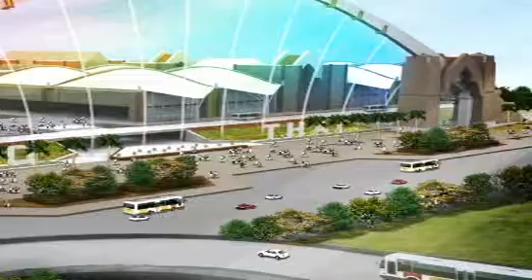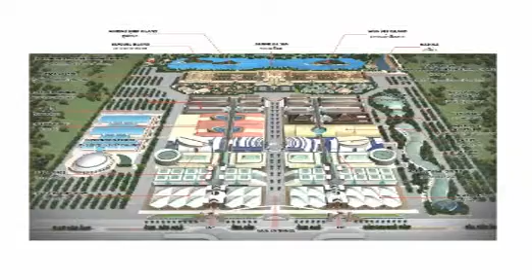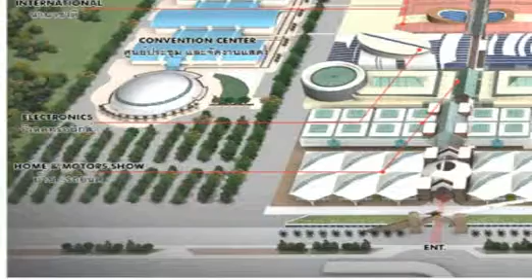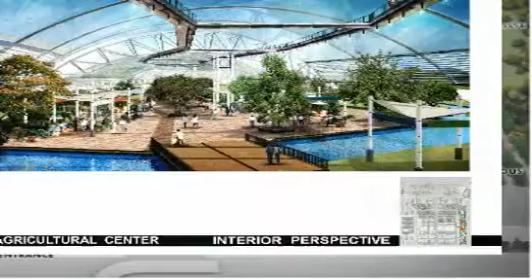Background: at the initiative of Mr. Torsak Bamrungtakul, Managing Director, and Kun Grisada Limamapa of Patumwan Light Company Limited, a seafront area of about 1,050 rai or 420 acres. His concept was for a large trade exhibition center to be created on the area as the market for all types of merchandise, with emphasis on opening up outlets for mass retailers so as to create jobs and opportunities for small producers, affording them direct access to the market without passing through middlemen. Costs can thus be reduced, while the potentials of the seaside town of Mahachai or Samut Sakhon province, the major seaport on the Gulf of Thailand, are enhanced and highlighted.

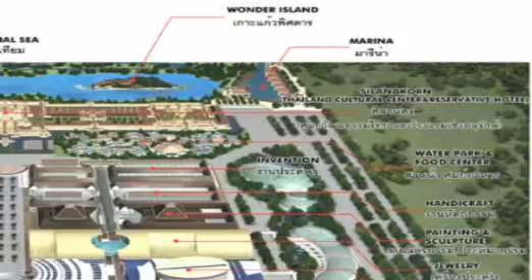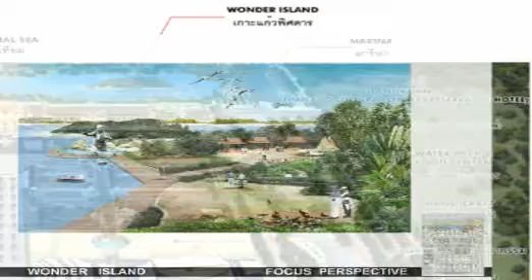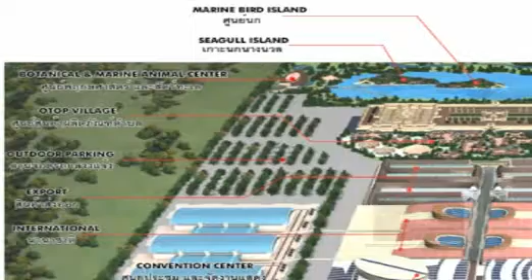For such a major market for mass retailers, the area will be developed as an eco-tourist site with the conservation of marine plants and animals, as well as the mangrove forest. Venues for exhibitions, seminars, and performances will be built to attract visitors to take part in various activities, relax, and shop for food and commodities at local and national levels.

The Expo Thai project is located on the Seaside Road, Phanthai Norasing Sub-District, Mueang District, Samut Sakhon Province. The project has the following accesses:

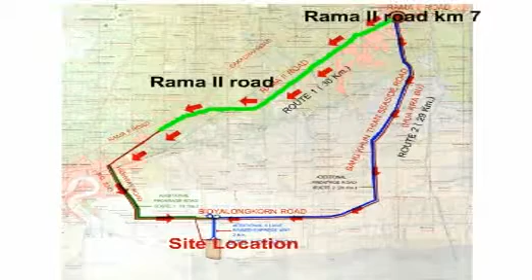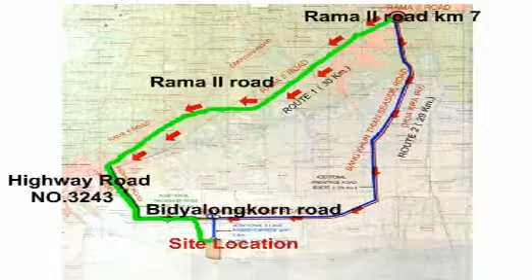Existing transportation routes from Rama II Road at kilometer 7. One travels along Rama II Road and turns into highway number 3243, Mueang District, Samut Sakhon Province, to Bidyalongkorn Road and the project site, a distance of about 30 kilometers.

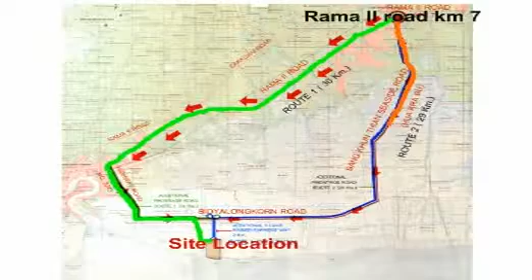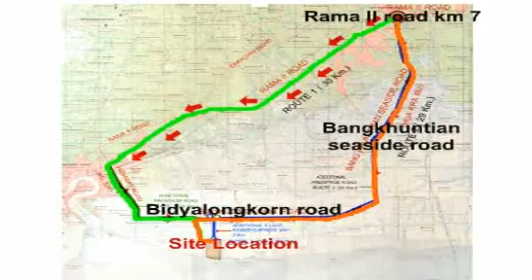From Rama II Road at kilometer 7, one takes the Bangkhuntian Seaside Road and turns into Bidyalongkorn Road and the project site, about 29 kilometers in distance. The project site is about 65 kilometers from Suvarnabhumi Airport.

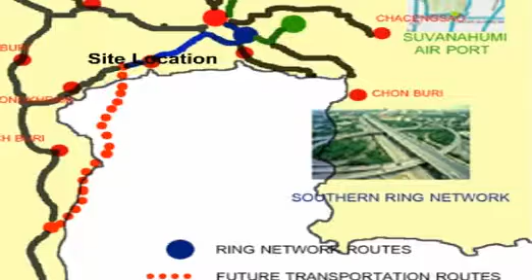Future transportation routes: BMA Southern Ring Road Project, Bang Pli towards Bangkhuntian. The coastal motorway lining the Gulf of Thailand with the southern region. The new southern MRT from Rangsit to Mahachai Station.

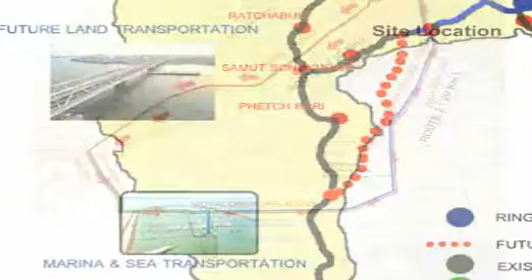Additional transportation routes facilitating access to the project: a parallel road from Rama II Road from Mahachai New Town to Bidyalongkorn Road in front of the project site, about 14 kilometers in distance.

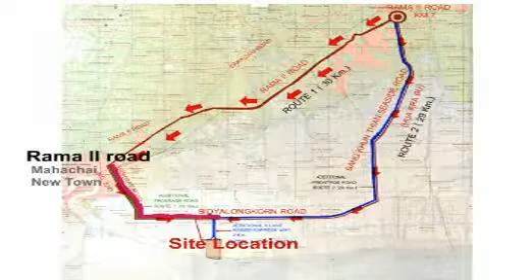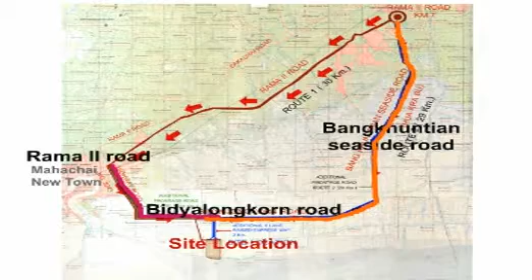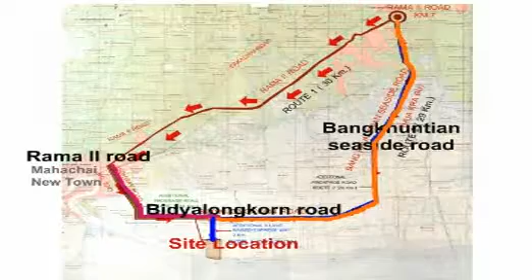A parallel road from Bangkhuntian Seaside Road to Bidyalongkorn Road, about 29 kilometers in distance. A raised expressway from Bidyalongkorn Road to the entrance of the project, about 2 kilometers in distance.

Project components: conceptual idea, land use and building area. Sellable part of the project. First, Exhibition Trade Center. Concept on marketing and finance.

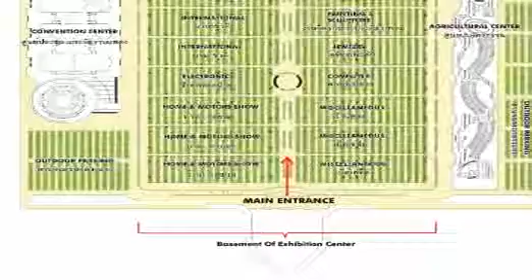The Exhibition and Trade Center is the most important part of the project as main income earner. The construction of the entire project can be funded by space leasing. 20,000 commercial units of 2 by 3 meters can be set for a 40-year lease at 600,000 baht each. This represents a lease of 15,000 baht a year or 1,250 baht a month, which is highly competitive.

Yet the amount raised can fund the entire project or most of it. The project's sale concept is similar to that of major department stores, which mobilize capital fund and minimize bank loans for the construction. This concept therefore opens up opportunities for small retailers with modest funds to start businesses of their own, which can be sustained by the next generations.

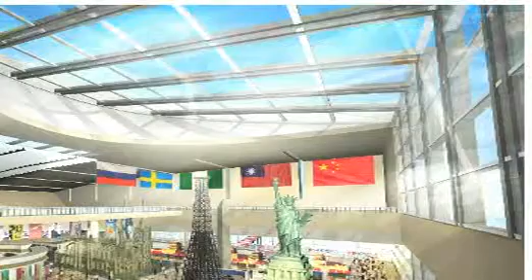Architectural design concept: the Exhibition and Trade Center needs large and open space, divided into various trade zones as designated in the project. The design is therefore an open plan, featuring a superstructure of steel frames with supporting piles sparingly used. The structure is neat, with metal sheets as the main material for walls and roofs.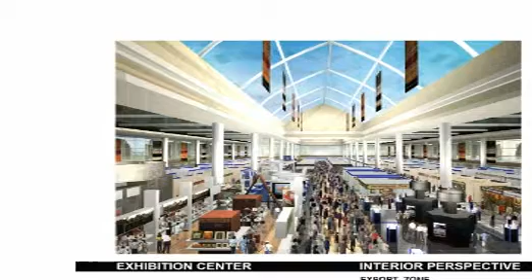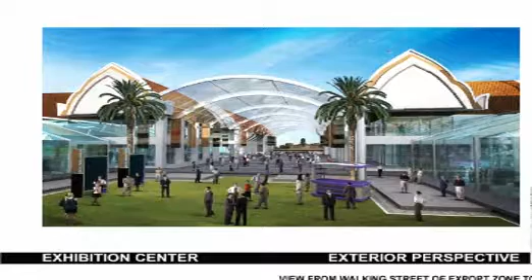The structure takes the appearance of a modern building in the front. The inner part increasingly combines contemporary with traditional styles by means of roof and wall decorations, harmonizing with the next zones.

Convention Center, first auditorium: designed as a circular dome-shaped building for the free flow of space and maximum audience capacity, affording wide-angle views from all seats.

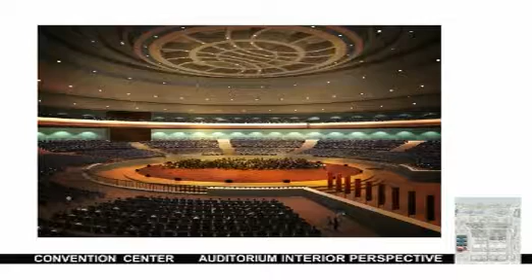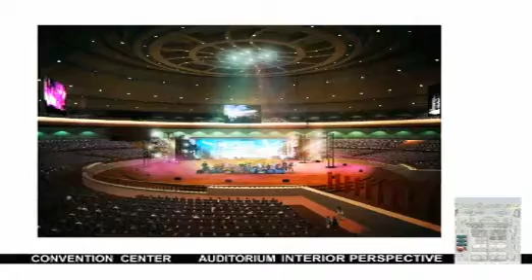Seats are arranged in stadium type, with the arena to put up performances and dressing rooms for performers. The building accommodates about 10,000 people at one time. The outer area can be used for related activities such as open-air performances, bazaars, and fairs.

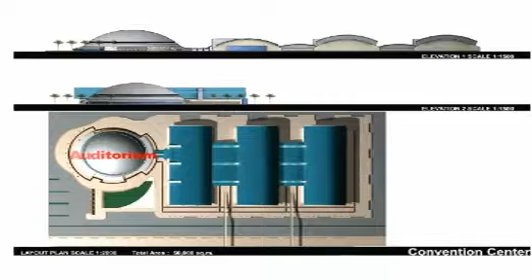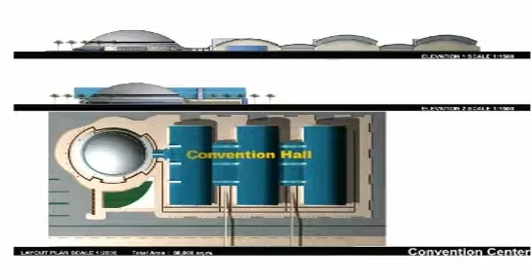Second Convention Hall: a group of 3 buildings meant as the venue for major exhibitions. It can take in the bulk of people and merchandise, such as trade shows, conferences, seminars, and feasts.

The first building is a one-story structure of 12,500 square meters. The main hall is divided into 2 parts to serve as venues for medium to large functions.

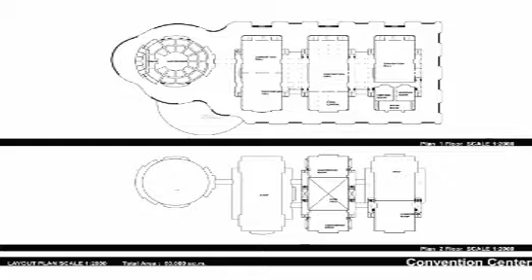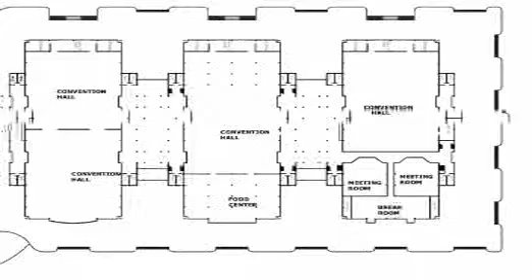The second building is partly an open, high-roofed one-storied hall, partly 2-storied, with an entire area of 18,000 square meters as venues for large functions. There is a large dining hall of 2,500 square meters and 2 conference rooms accommodating 2,000 people each.

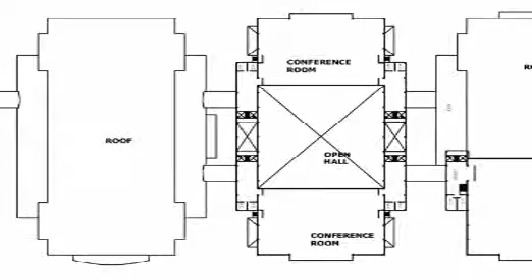The third building is also partly an open hall of 1 story and partly 2-storied, with an entire area of 17,000 square meters for large functions. There are 2 medium conference rooms accommodating 400 people and 1 large conference hall accommodating about 2,500 people.

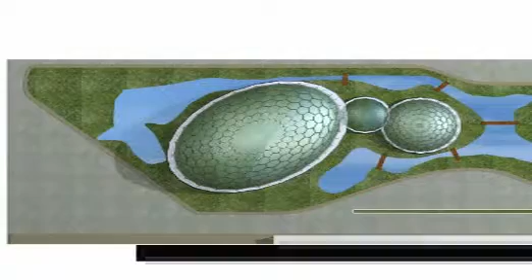The Agricultural Center is divided into 3 zones. First, temperate climate plants, housed in a dome-shaped building with temperature and light controls according to each plant's requirement, as demonstration plots for plants and flowers that are not normally grown in Thailand.

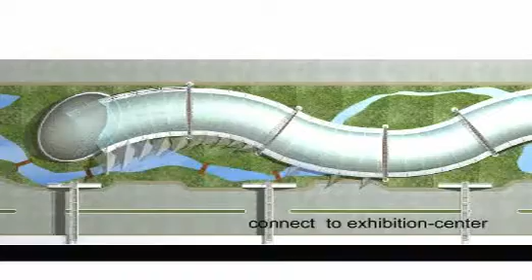Second, soilless agriculture. This zone is dedicated to agricultural technologies with hydroponic plants and vegetable growing, research, plant breeding, and propagation techniques. There are 3 one-story buildings, and also a center for the sale of produce and products.

Third, organic plants and vegetables, housed in a group of 4 one-story buildings. The zone is meant to provide quality agricultural products for sale, as well as to demonstrate new technologies in agro industry and agricultural processing industry.

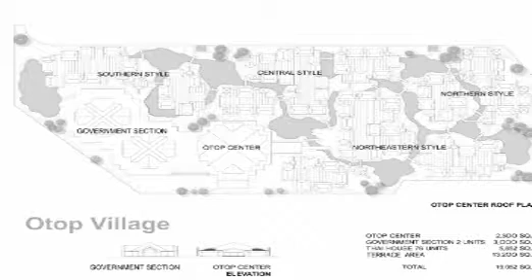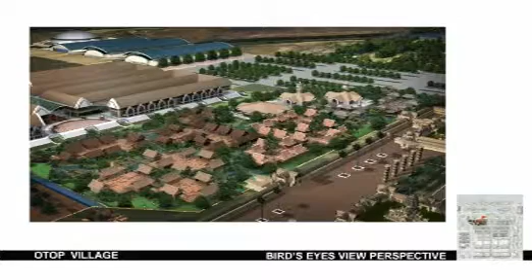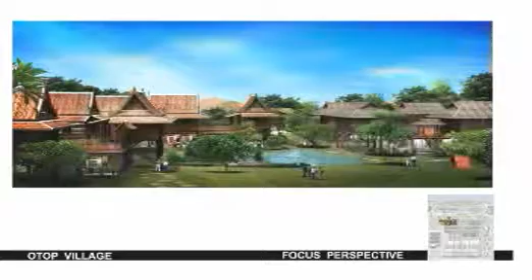OTOP Village, or One Tambon One Product Village, built as clusters of buildings, 4 in number, indicating 4 major regions comprising 76 units, designated as 76 provinces of the country. The village is meant as outlets for local products of each province. The units feature unique architectural styles of the localities and regions.

Water Park and Food Center, built in ancient Thai atmosphere with water-based culture and even a large dining hall with a running stream. This is the combination of modern lifestyle with traditional Thai life.

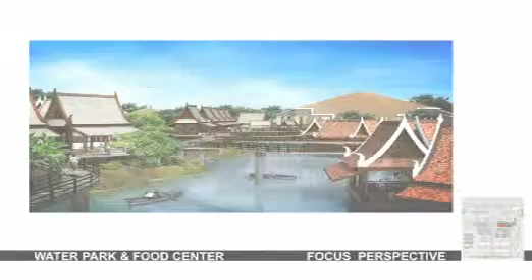The dining hall comprises 2 one-story open buildings with about 2,000 square meters area each. It is designed to correspond with the stone sanctuaries.

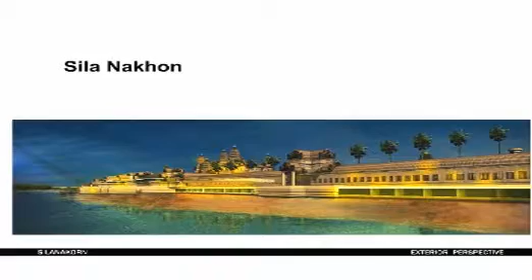Silanakorn Thailand Culture Center and Reservative Hotel. The originator of the project wished to have a cultural and historical center in a major building which is spectacular and large enough to house objects and data, a form of museum where past glories, traditions and lifestyles of the Thai nation can be put on display.

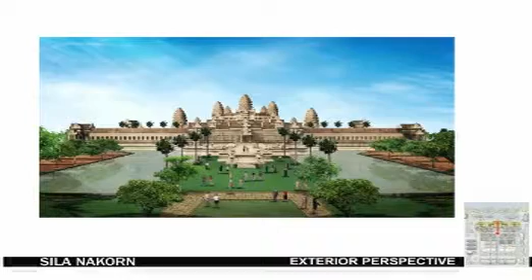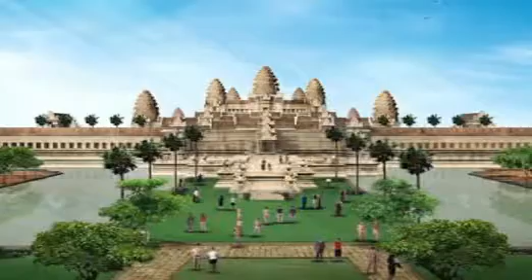This is meant to be a place where artworks of all disciplines can be put on show with the help of new presentation techniques. The architect used inspirations from the study of ancient history and the greatest architecture on Thai soil as the basis for the design of a great and spectacular but functional building.

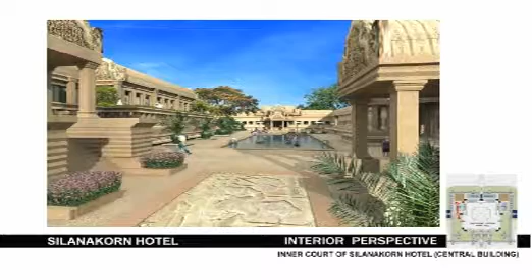This is the transportation of religious symbols from their original site to a new location, a building named Silanakorn. Moreover, to afford visitors time to fully appreciate the great history of the Thai nation and to absorb the beauty and variety offered in various buildings, a unique conservation place is offered as accommodations as a 200-room hotel, embedded in the Silanakorn building as Silanakorn Reservative Hotel.

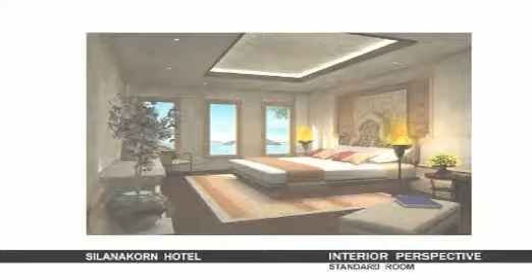Guests can rest in the ancient stone sanctuary ambience while afforded the views of artificial sea and the real sea, and the opportunities to participate in various activities in the project area within 2 days to 1 week per each visit.

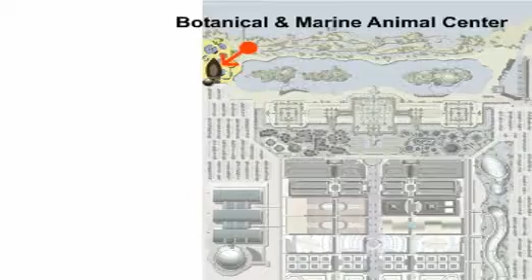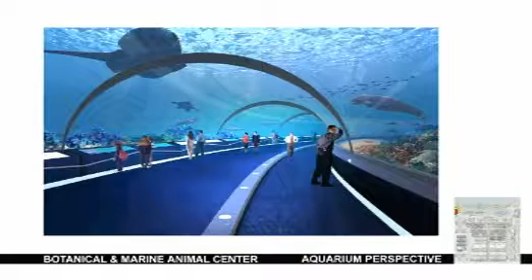Botanical and Marine Animal Center. The center is situated in the mangrove area on the seashore with a barge-shaped building divided into 3 sections, namely fancy fish and marine plants and animals, the round glass container with deep-sea fish, and the glass tunnel of about 100 meters to observe the underwater world.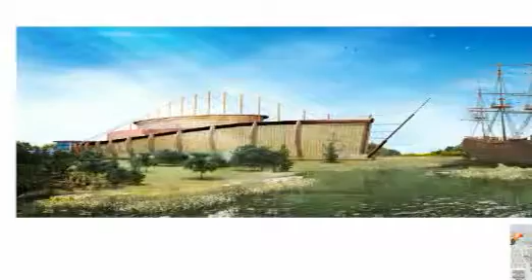The 3 sections have a combined area of about 5,000 square meters. The surroundings are made into a study trail of mangrove forest, with marine ecosystem to be experienced. There is also a small boat pier offering boat tours of the mangrove area in the Gulf of Thailand.

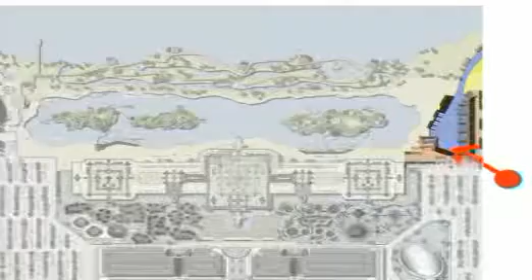Marina, built as a landing and stopover site, the only one for tourist boats in the Gulf of Thailand area. It can accommodate no less than 100 boats, also a dockyard. The marina is anticipated as a popular stopover and rest place for marine tourists and sailors at a short distance from Bangkok.

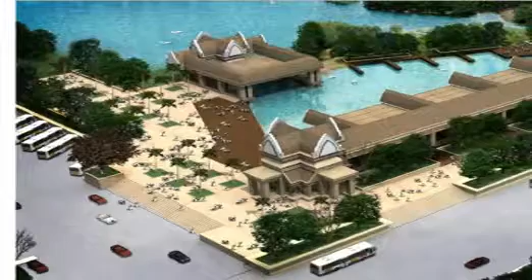Tourists can leave their boats and stay in Silanakorn Hotel or travel further to the neighborhood in Bangkok or Pattaya. Non-saleable part of the project.

First, Seagull Island. A man-made island created on the artificial sea as the habitat of the seagulls, with structures to resemble the natural habitat and careful landscaping. It is meant to conserve seagulls and to afford visitors opportunities to observe them in natural surroundings using binoculars. It is meant to complement the seaside atmosphere of the project.

Next, Marine Bird Island. An island created in the artificial sea as a center of various marine birds, both in open system and in aviaries in natural surroundings. It is meant for tourists to come and study various birds in nature using binoculars. Some birds can be hand-fed as well.

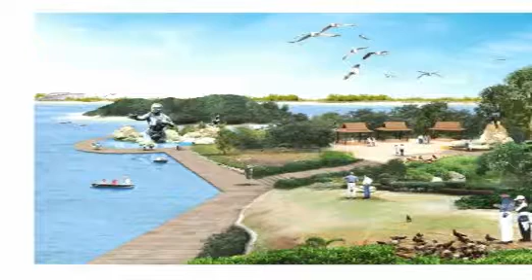Wonder Island. Another island created in the artificial sea in accordance with the famous literary work of Sunthorn Phu. It is intended as a tourist site and study center for Thai literature. Here, one finds literary figures and structures, literary works and displays. Visitors not only can relax in a pleasant atmosphere by the sea, but also learn about Thai folk literature.

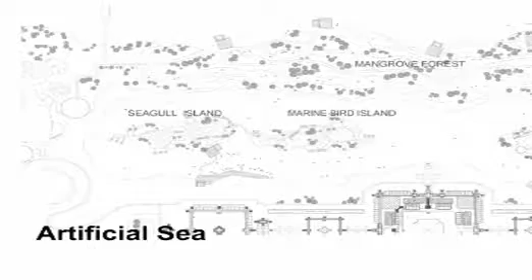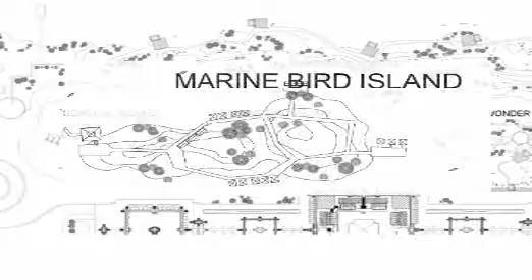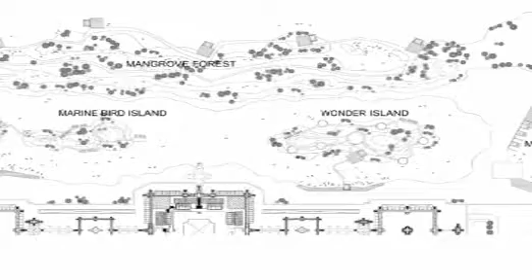Artificial sea. The artificial sea is created next to the mangrove area as an enclosure where 3 islands are located: the Seagull Island, the Marine Bird Island, and the Wonder Island. It has the appearance of a quiet sea without waves, but with sea breeze, sandy beaches, clean and clear water at no great depth. Visitors can relax by the sea, swimming, diving, kayaking, paddling, and taking a walk on the floating bridge leading to various islands. When viewed from Silanakorn Hotel, the artificial sea appears part of the real sea.

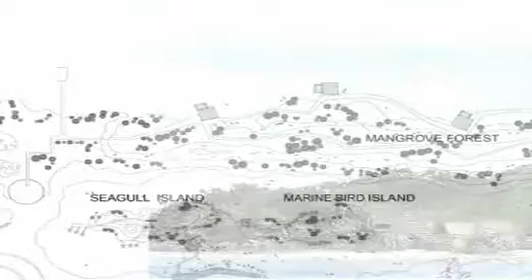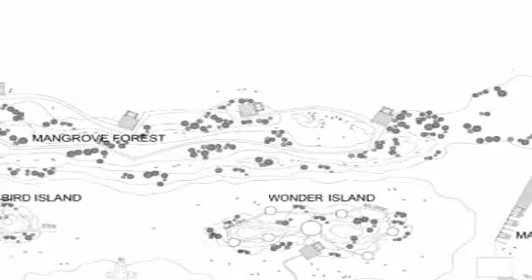Mangrove Forest. The area used to be a mangrove area. Rehabilitation can be undertaken with the replanting of mangrove trees along the entire shoreline. It will be beneficial to the whole area and the marine ecology. Tourists can study nature with study trails created in the mangrove forest, paddled boats for mangrove tours, and other related activities. This will be another ecotourist site of the country.

It is expected that when completed, the center will play a significant part in the development of the locality and the country, so much so that it could be placed in the national agenda of Samut Sakhon province. This preliminary proposal is hoped to trigger more constructive ideas in urban development, retail trade system, and ecotourism site development for the country's future.